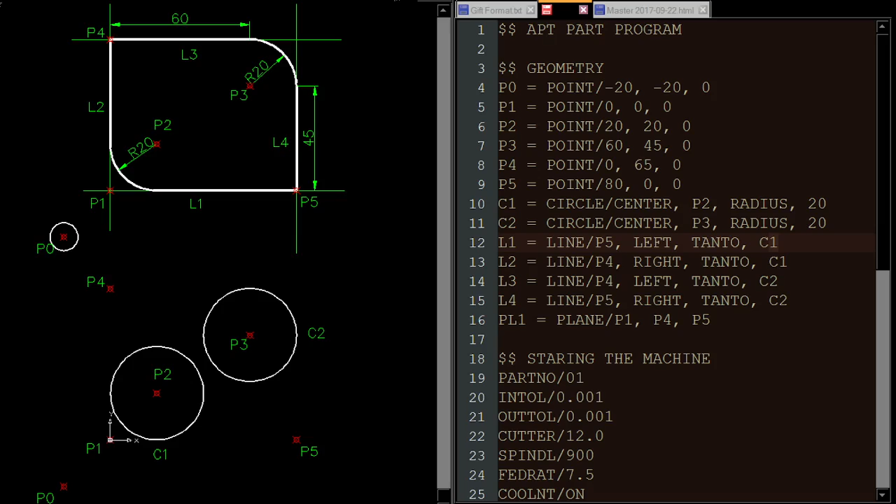Next, we will start defining the lines. So the first line here is using point P5 and it is tangent to circle C1. Now from P5 to C1, there are two tangents possible, one being on this side, the other being here. In the program, we have been told to use the left side tangent. So when you are watching from P5, this is the right side tangent, this is the left side tangent. We have been clearly told to use the left side, so we don't have to use this. So this will not be defined.

Next line is L2. That one uses point P4 as one of the points, and it is tangent to circle C1 once again. Once again, from P4, there are two possible tangents for circle C1. Here we have been told to use the right side tangent. When you are watching from P4, this one becomes the left side tangent and this one is the right side. So this will not be defined, and this is the one which is getting defined here.

Now L3, the line L3 is defined from P4 and it is tangent to C2. Once again, there are two tangents possible, and here we have been told to use the left side of the tangent. When you're watching from P4, this one is the left side, so this is not defined.

Then coming to L4, that is from P5, and once again we have been told to use the right side of the tangent. The left side I have not created here.

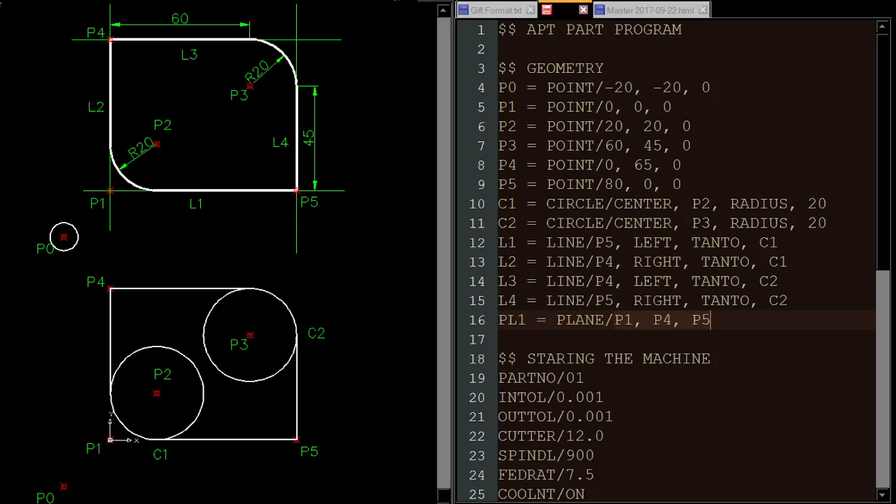After this, we are giving a series of commands to prepare the machine for cutting. You can clearly see, first we have the part number, then inside tolerance 0.001 mm, outside tolerance 0.001 mm, cutter diameter being 12 mm, spindle speed being 900 rpm, feed rate being 7.5 mm per minute, and coolant should be turned on. So now that the geometry has been defined and the machine has been readied, it will start executing the motion commands.

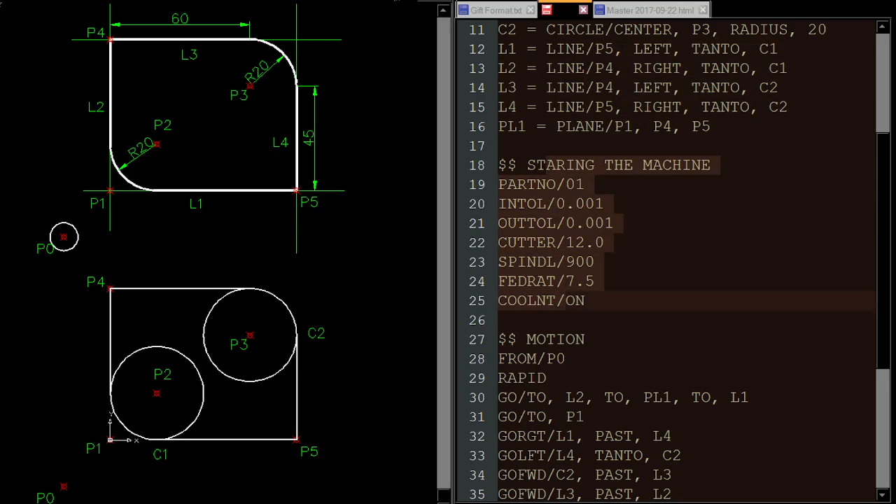It can be noted here that when we defined the lines, they were not defined as line segments, but as infinite lines which didn't have any endpoints. Now the motion of the tool, while it moves, will be using these infinite lines as reference points for the path of the tool.

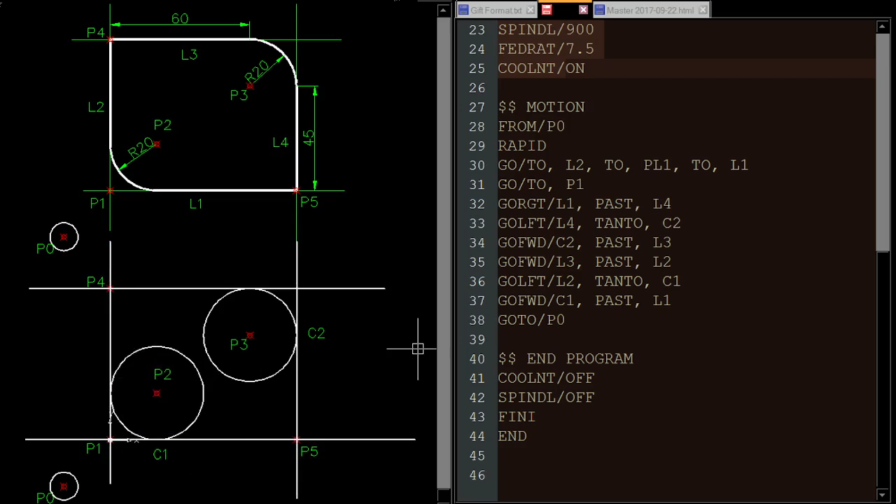Now let us focus on how the tool is going to move based on these commands. First, the motion is going to begin from point P0. That means the tool will be at this point at the beginning of the program. Now it has to rapidly move to the L2 point. All its motion will be occurring in this plane PL1, and from L2 it is going to slowly move to L1.

Next, the tool has been told to move to P1. So what will happen here is that the tool will move such that this point here comes in contact with P1. Now it has to go right side.

Now the tool has to move right side past L4. L4 is the line which is here, so it has to cross line L4 and go to the other side of it. The tool is going to move straight in this path, crossing the line L4.

Next, it's going to move on L4 by turning left side. The previous motion was on the right side, and from this direction it has to take a left side turn and move such that it is in contact with the line L4, till it is touching the circle C2.

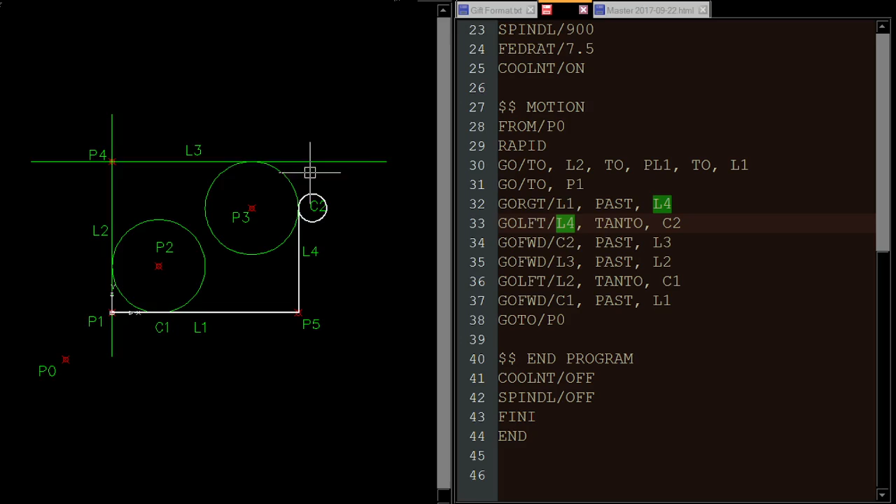Now the tool was moving upwards and it has to continue moving upwards but along the circle till it crosses line number 3. You can see the command here: go forward along C2 until it reaches past, that means till it passes the line L3.

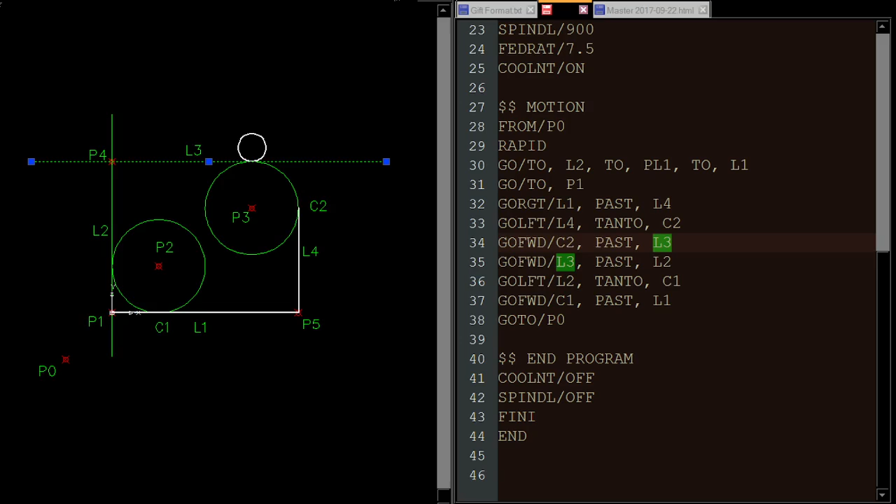Our tool here will move such that it maintains its path along the circle, and it will stop when the circle allows the tool to move beyond L3, that is past L3. So the machined surface will be appearing like this.

After this, next command, you can see it has to move forward, that means now it's moving left side. It should continue moving in the same direction till it passes the line L2.

Now this tool is going to move in a straight line here, keeping in contact with L3, until it crosses the line L2. At the end of this motion, this is how the surface is going to look like.

Next, it has to move keeping in touch with L2 till it comes and touches the circle C1. The command for it has been given here, so now it has to take a left turn.

It was moving towards the left side and it has to take a left turn to move downwards. It has to maintain contact with the line L2 and reach a point where it is tangent to the circle C1.

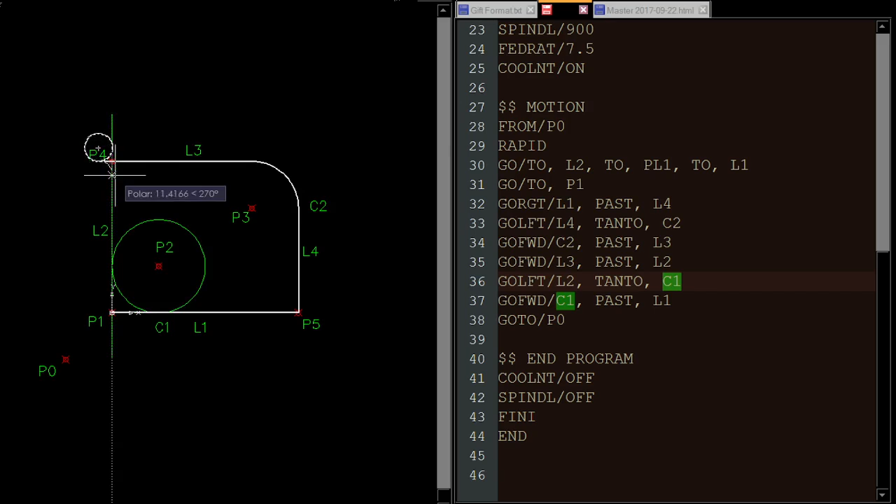So the tool is going to move like this, maintaining contact with L2, till it comes and touches the circle C1. The path that we get here will be like this.

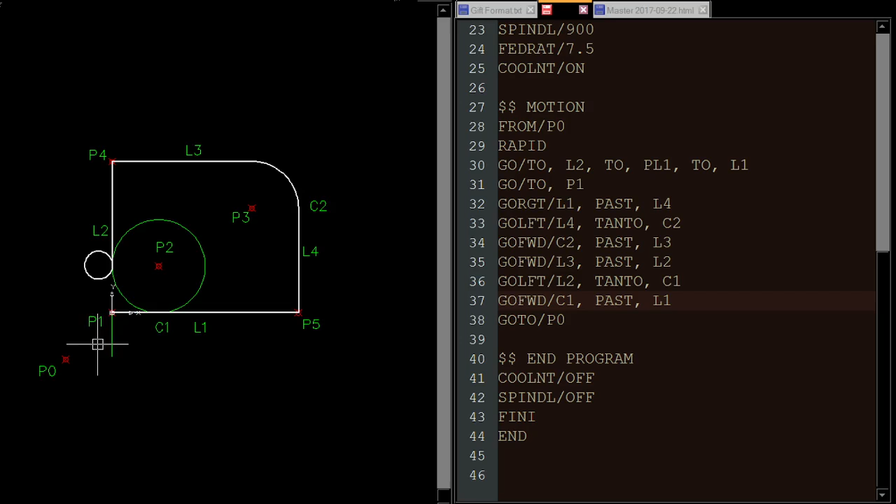Now in the previous motion it was moving downwards, and to travel on this circular path it has to continue moving downwards itself. The command has been given as go forward along the circle C1 till it goes past L1.

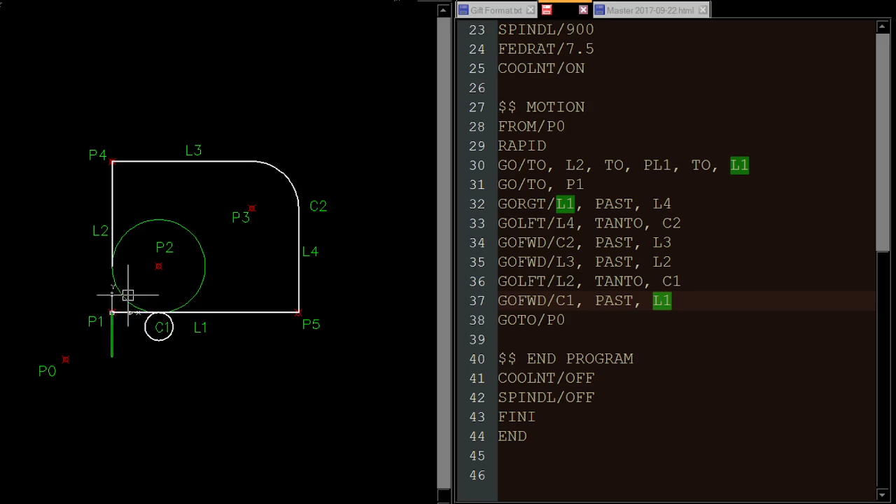So it has to cross L1 and keep in touch with C1. The tool is going to move on a circular path like this, until it goes past the line L1. At the end of this, the surface that is left with us is this.

You can see we had started out with the point P1. We had actually got a straight surface over here, but at the end when it came from L2 past this, we got a circular shape.

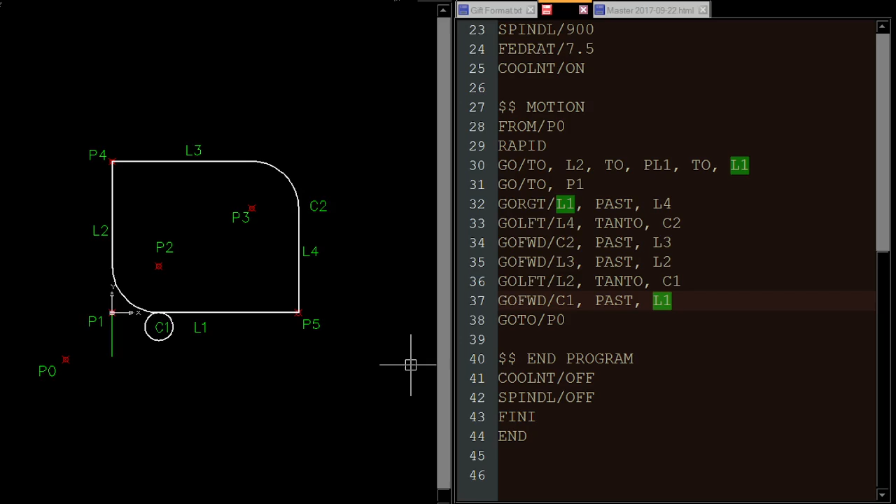Now since the whole profile has been completed, the tool is made to move back to its initial point, that is P0, and that's where the program ends. We should turn off the coolant, turn off the spindle, and give the finish and end commands. That's how the APT part program gets executed.